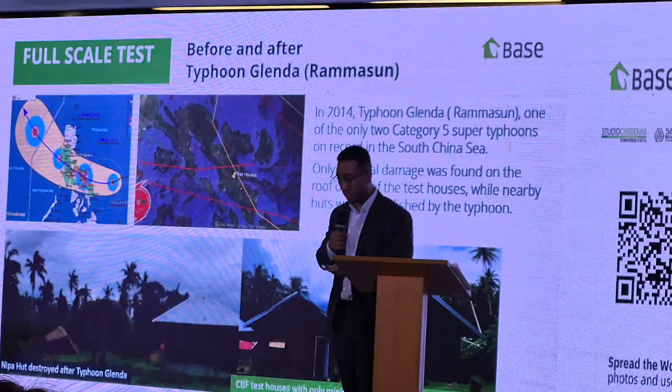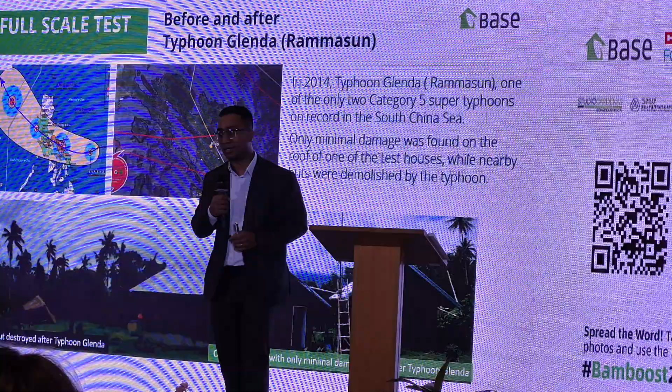As you know, our houses are very good at resisting typhoons. We did a full-scale test back in 2014, when we were still new to the Philippines, and we built 3 pilot houses in the southern area of Luzon. We tried out three different architectural styles, and we had a weather station there that could measure the wind.

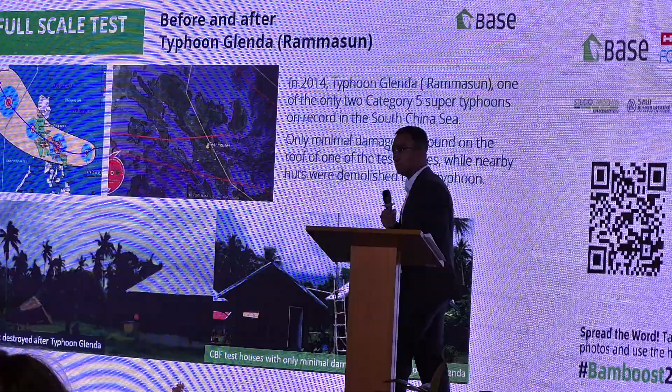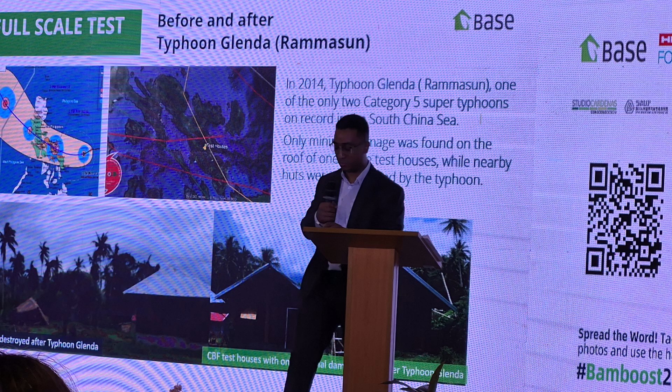Luckily or unluckily, we had a major typhoon pass exactly through the place where we had these houses. We went back after the typhoon, and you can see very minimal damage to the houses. The weather station that was there disappeared forever, we could not find it. But the last reading from the weather station was 220 kilometers per hour. And the good thing here is these houses are still standing.

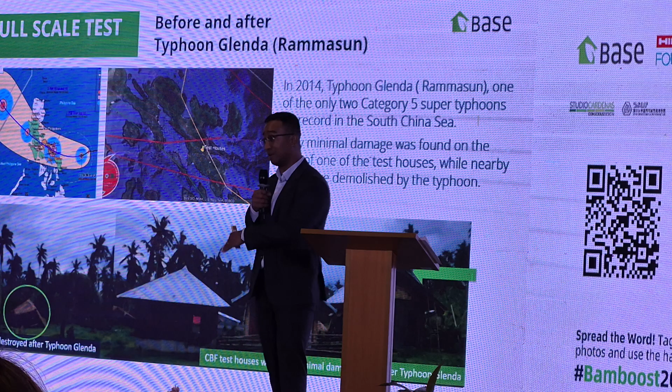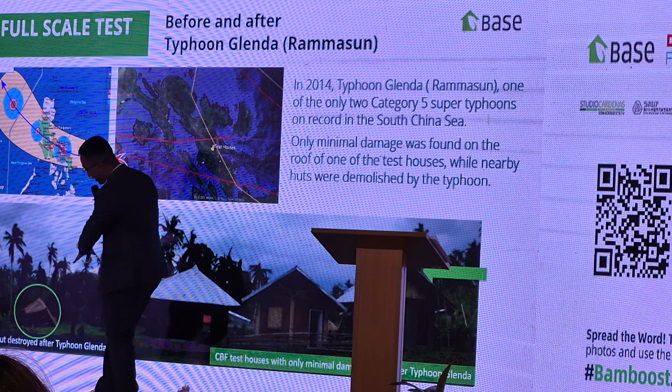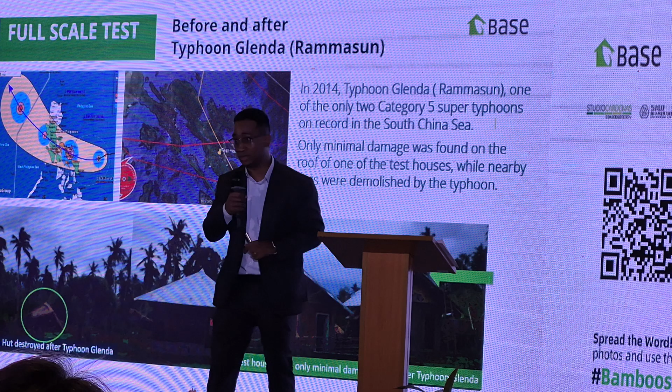People are living there. You can go take a visit and see how the houses have lived through the years. If you look at the farther end at the corner, on the left-hand side, you can see we tried building a house using the traditional approach, and you can see that the house didn't make it through the typhoon. What I'd like to emphasize here is, it's not related to bamboo, whether or not the house is going to stand.

It's actually the technology. With the right technology, you can build long-lasting, permanent bamboo houses anywhere in the world. Taking this as an example, we've tried and experimented and actually built different houses. For example, one-story single detached, one-story duplex. We've also built two-story houses.

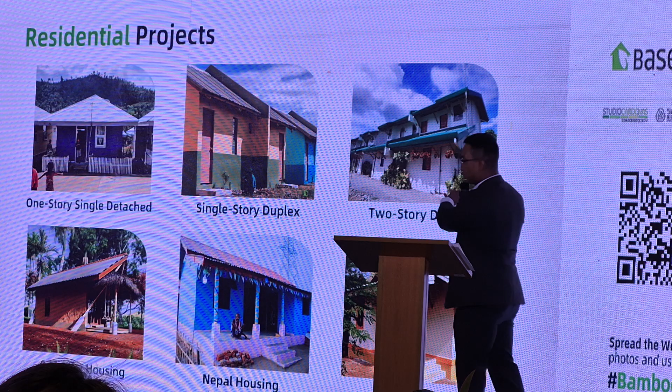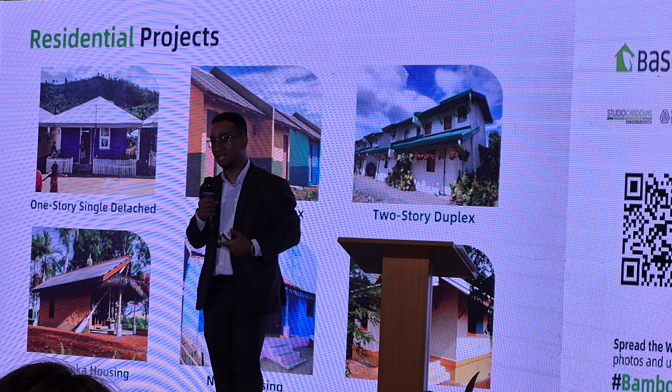I'm really happy to say that our Filipino technology, cement bamboo frame technology, is being well known throughout the world. We've started seeing requests from countries around the Philippines. For example, we've had collaborations with Sri Lanka, Nepal, and India, where we built CBFT houses. What's important here is it's Filipino engineers who go there, transfer the technology, transfer the learnings we had in the Philippines, and help the local nationals over there build these houses. That's something really proud to be in.

Beyond this, we also work on various non-residential projects, for example, school buildings, community centers, weaving centers, offices, orphanages, and also community centers.

To facilitate construction of all these houses and structures around the Philippines, we have a strong network of partners who treat and provide high-quality construction-grade treated poles. In particular, we have 8 treatment facilities, 9 coming, scattered throughout the Philippines: 2 in Luzon, 2 in the Visayas, and 4 in Mindanao. Altogether, they can produce 16,000 poles per month. That's enough to build 150 houses every month.

At the same time, we are partnering with treatment centers in Nepal and Sri Lanka to ensure they can also provide high-quality treated poles in those countries. So up to now, the global impact of our efforts so far is that we built around 2,000 houses. We've saved around 35,000 tons of carbon dioxide. We have sheltered over 10,000 people, and we've trained over 2,000 individuals.

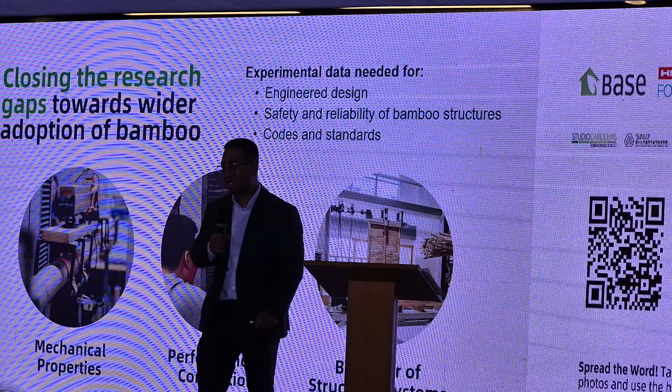Now, one of the most important things about working with bamboo is that there is a strong lack of experimental data. So if you ask any engineer, I want to build with bamboo, they're going to say, no, I cannot do it because I don't know any properties of bamboo.

So right now, we are working really hard to close that gap, provide the necessary data so that you can design and build your own structures.

Primarily, we are working on three different aspects: mechanical properties, which has to do with the behavior of the material itself; the performance of connections, unfortunately one of the least studied topics of bamboo engineering but at the same time the most important thing of the structure; and on the larger scale, the performance of structural systems that make up all of our houses.

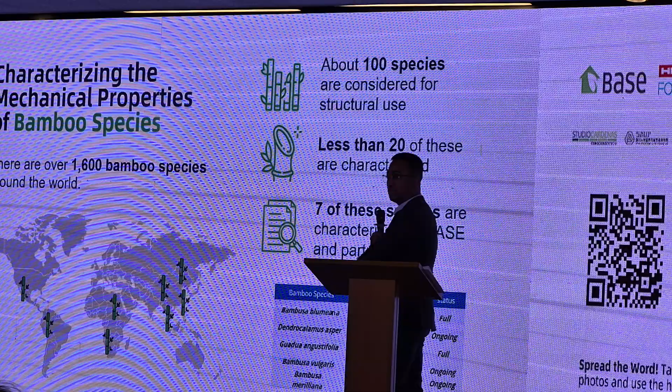Globally, if you look at the species available, there are around 1,600 bamboo species, but only 100 or so are used for construction. And out of the 100, unfortunately less than 20 of them are characterized. Over the last couple of years, BASE and our partners have been working really hard to characterize 7 of them. 5 of those species are available in the Philippines and are already being used for construction through our partners.

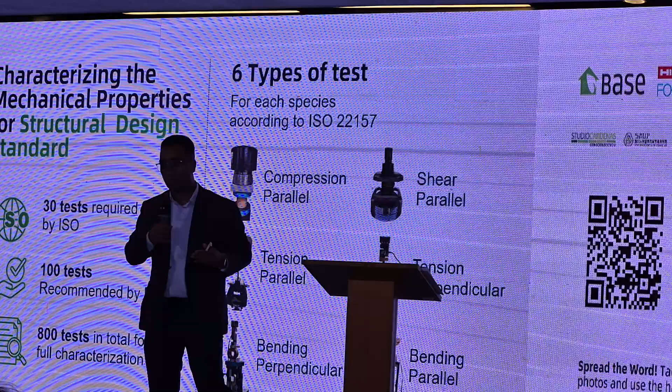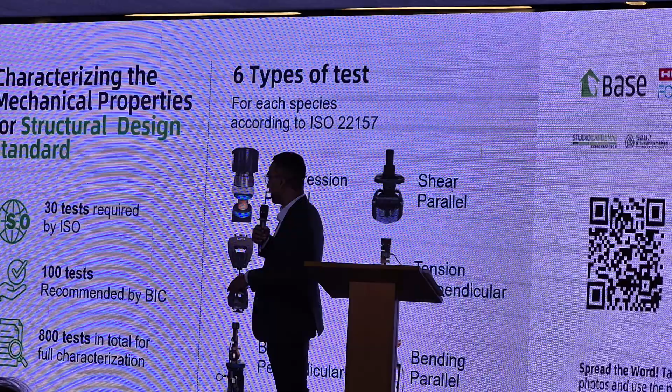A typical characterization process involves testing all of these 6 mechanical properties: compression parallel, shear parallel, tension parallel, perpendicular, and bending. ISO standard tells us we have to test at least 30 different samples. But very early on, we realized that 30 is nowhere enough.

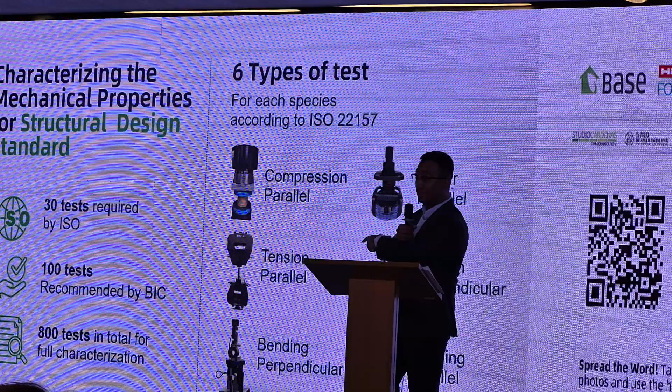The natural variability of bamboo is so high that 30 is not enough. We have to test at least 100 specimens for mechanical properties. So if you want to get a complete characterization of the species, you have to test over 800 specimens. That's a lot of samples to be tested.

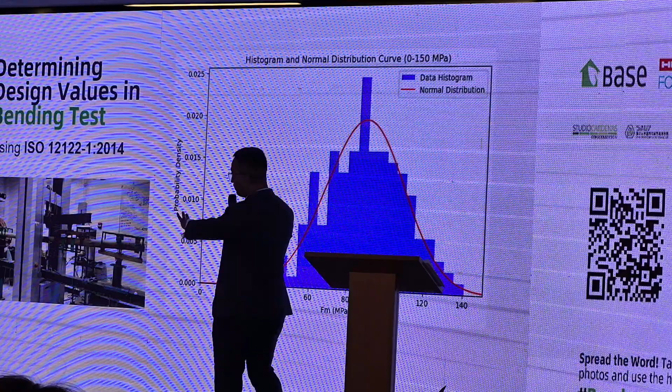And here's an example of how we do our tests. You can see how we do bending in our laboratory, and you can see in the background our R&D engineer and a student from Coventry who's helping us out.

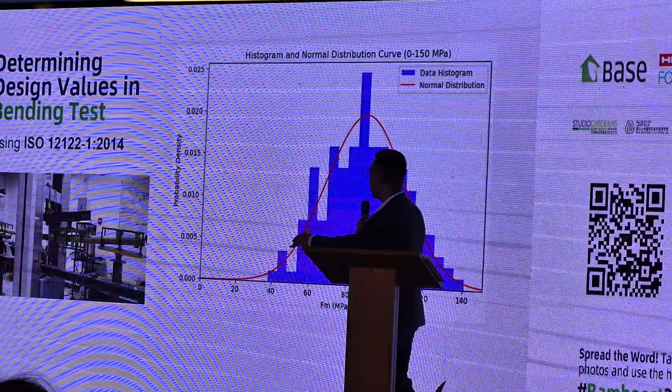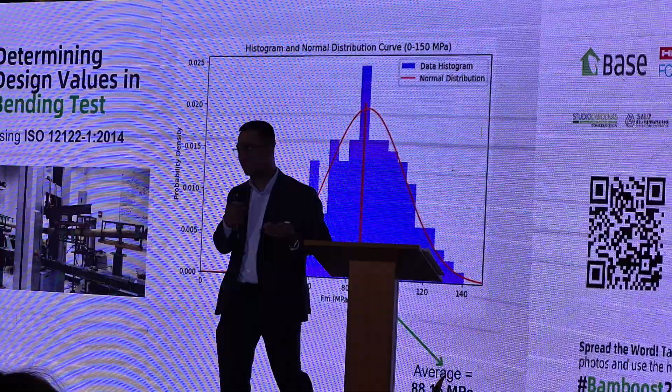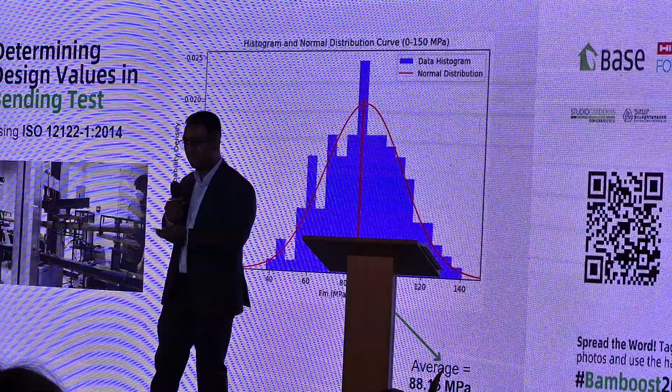But if you think about this, if you design houses using average values, then 50% of the time your members are not going to be strong enough and the house is going to collapse. So we have to choose a smaller value that will ensure that the structure will remain standing.

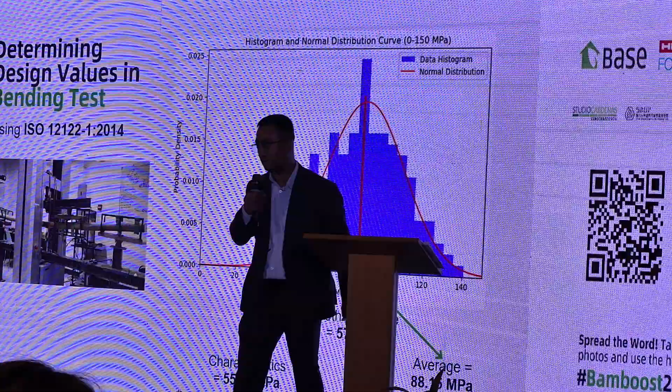So the standard here is to take the 5th percentile of the sample, and we use the 5th percentile of the sample to determine the characteristic of the population. So the value that we're going to use for actual design is 55.18. It's going to be at the lower bound of what the species will have.

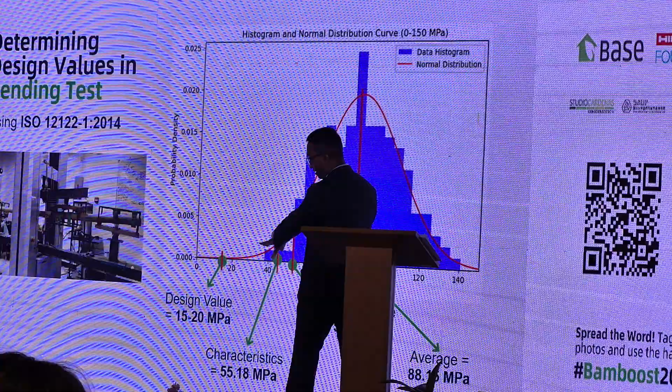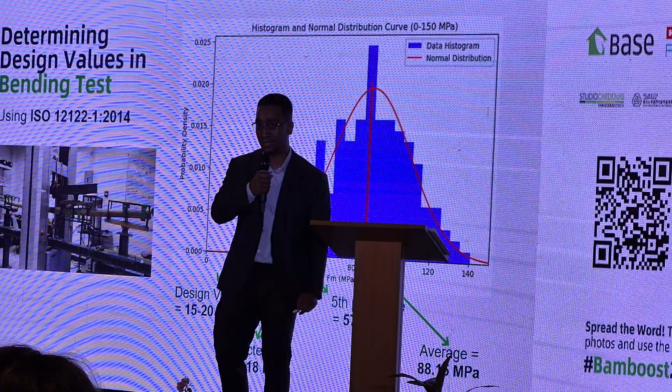Now, when we do the structural design calculations, we have to again adopt safety factors, and the actual value that ends up for the design is around 15 to 20. So if you look at the data, you will not find a single bamboo pole that falls over there. It's really, really safe, with a very high margin of safety, and it's very unlikely to see any damage to the structures.

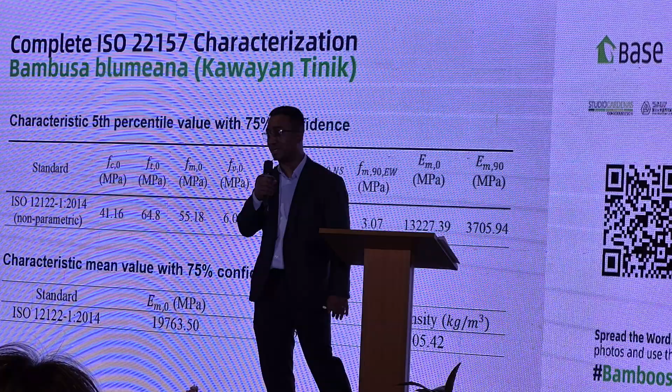So this is the data for Kawayan Tinik, Bambusa blumeana, with complete characterization. You can see all the properties that we need for design, and you can use this to do your structural analysis. It's in the Philippine bamboo guideline.

Now you have to realize that we did around 800 tests, and for this species we did around 1,200 specimens. If you think about it, how many species are there in the world? Over 100 that we can characterize and build houses out of. And if you want to fully characterize all of them, you're going to have to do around 80,000 or over 100,000 tests. That is simply impossible, an insane number.

So we have to look for an alternate way of doing it. Actually, our students from Bamboost University have found a very nice way to get around this. I'm going to show you an example.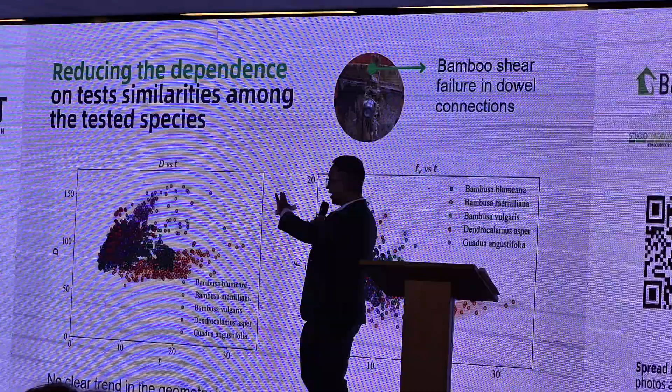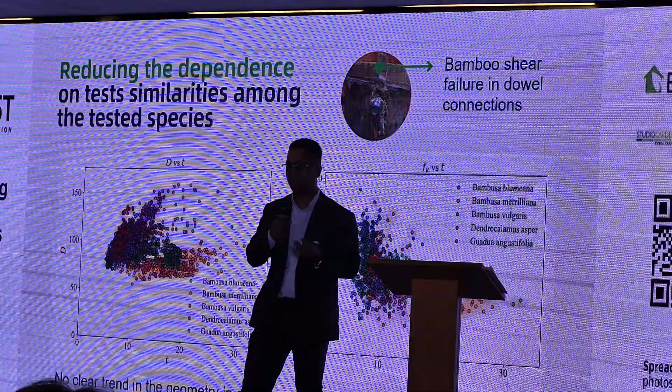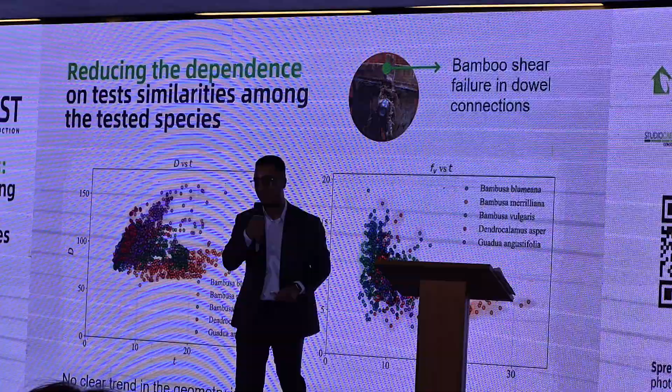So this is a scatter plot of diameter versus thickness of all 5 species we've tested in the Philippines: Bambusa blumeana, Kawayan tinik, Bayog, Bambusa vulgaris, Kauayan kiling, Dendrocalamus asper, which is Botong, and Guadua, iron bamboo. If you look at the properties of diameter versus thickness, which is geometry, you can see there's a lot of scatter in the data. It's a mess, there's no pattern, nothing you can derive out of it.

But if you look at the performance, or the correlation between shear strength and thickness, you can see some pattern here, but in general it is still very diverse.

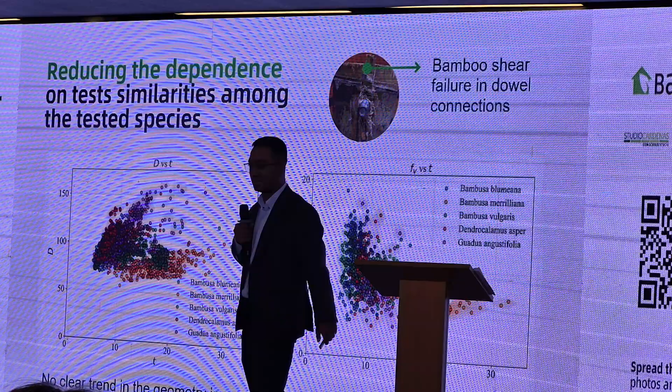It's still very varied, still very hard to see a clear trend, right? So what we found out here is, if you rearrange the geometry a little bit, then a clear pattern emerges among all the species we have tested.

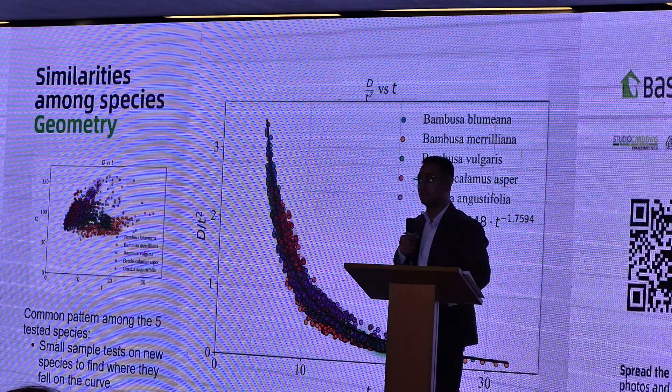And that's very important here. You can see some species fall over here, some fall over here, but what's important is a common trend line can predict the properties of all 5 species we have tested so far.

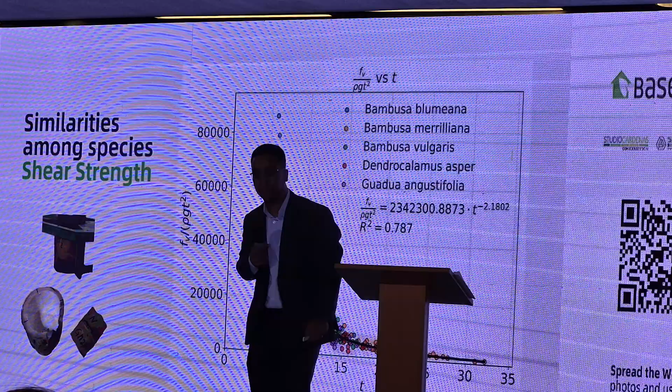And that's not even just for the geometry, you can also do it for the strength. So you can see how a clear pattern emerges.

Now here what you see is the median curve. We're not going to design for the median because 50% of samples will fail. So we go for a lower bound characteristic, and if you look at the design curve, there will be no specimen that will ever fail if you use the design curve.

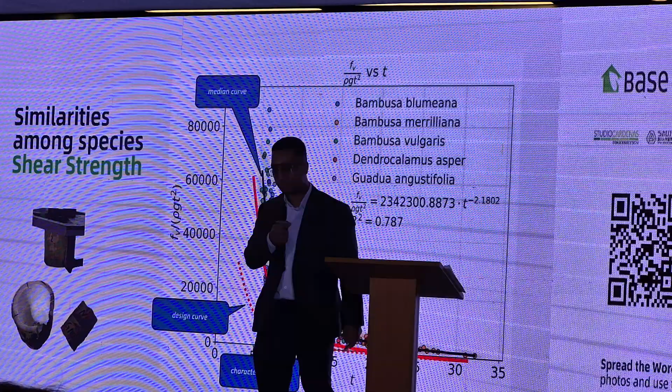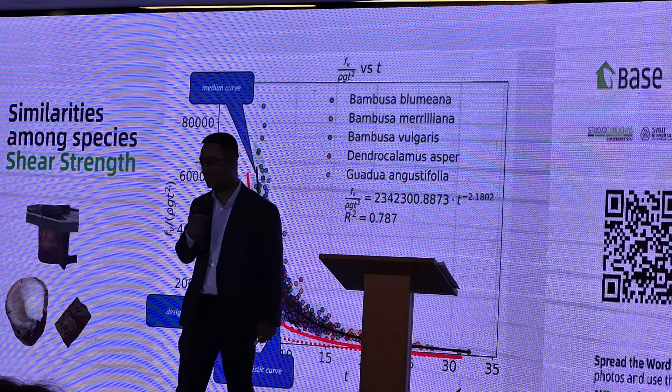So you can see a clear trend and pattern. Now what's important here is we tried something more. We tried fitting into this curve a new species that you cannot find in the Philippines.

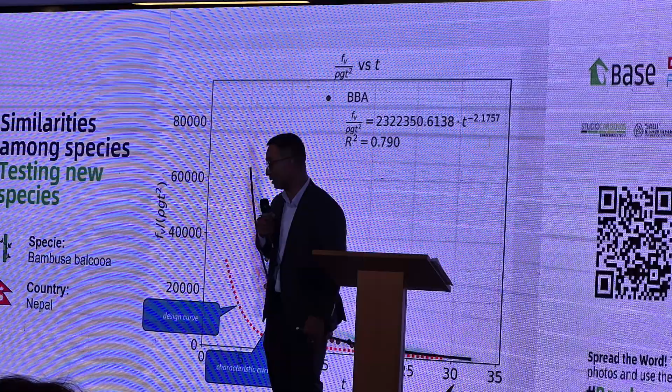So this is from my data from Nepal, and you can see the species Bambusa balcooa falls exactly on the median line. So you're looking at a species that has never been calibrated to this curve, and yet this curve can predict the strength parameters of a new unknown species from an entirely different geography.

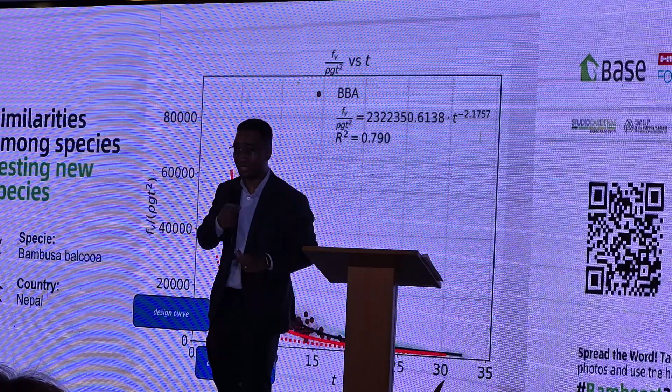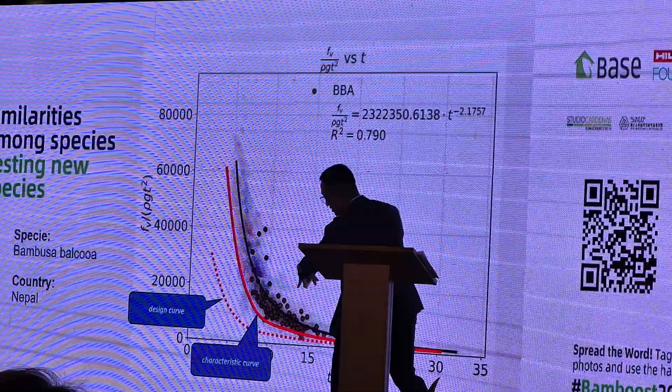That's very powerful. What it means is, instead of testing 800 specimens for a species, you can maybe test 10 specimens, see where it falls in this line, and still use this derived curve to get the design values. So it's going to make things really easy for you guys.

Beyond this, I'm going to talk a little bit about the connections. So in connections also, let's talk about our cement bamboo frame technology. Even a single story house like this will have maybe 20 different connections.

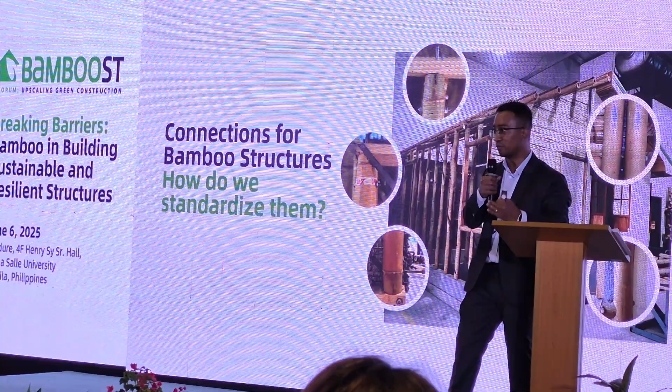Similarly to mechanical properties, the current state of the art for bamboo design is testing. All the 5 connections you see here have to be tested in a lab to find these design values. And simply thinking about this, if you move on to a large-scale structural system for high construction, you will have a lot of connections that you don't know how to design.

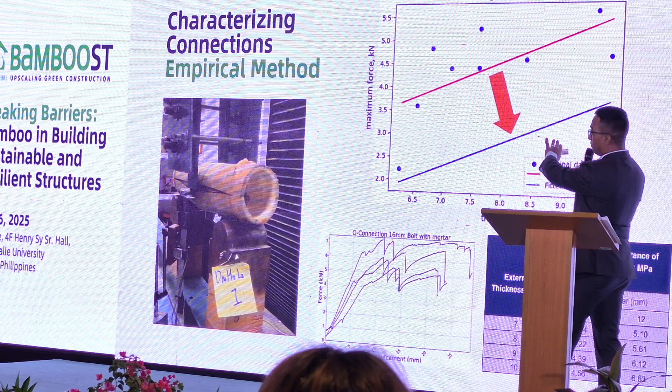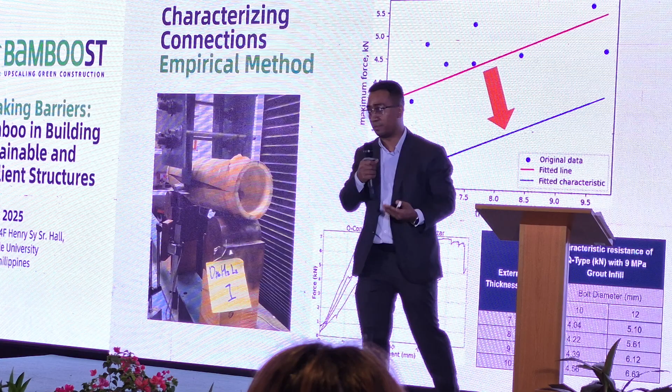And if you follow this state-of-the-art method where you do a test, find the correlation between maximum force and thickness, get the median value, get the characteristic value, and then convert that to a table and design with this table, it's simply impossible to keep up with the design. Even a house like the one I showed you will have 20 different connections, and you simply cannot do it. So we have to find a different way to design connections for bamboo.

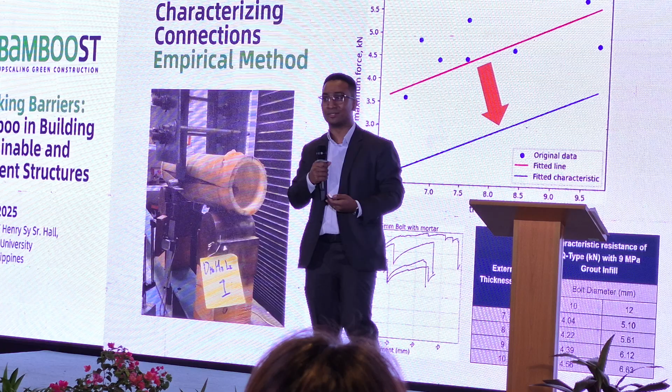And I have something very interesting for you guys. I'm going to take an example of an O-connection that we tested in our lab, and this is how a typical response looks like. About this point of time, you can see the curve tapers off, and in structural engineering we'd like to call it yielding.

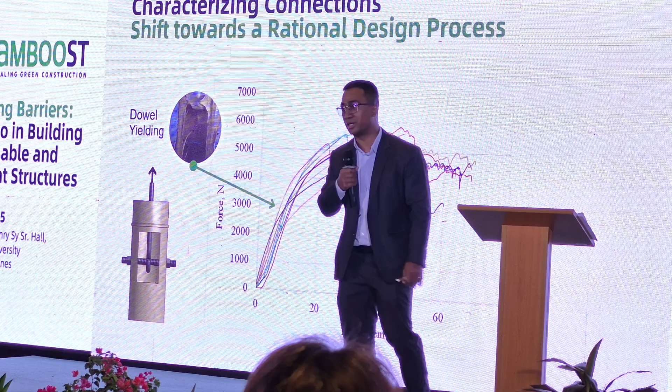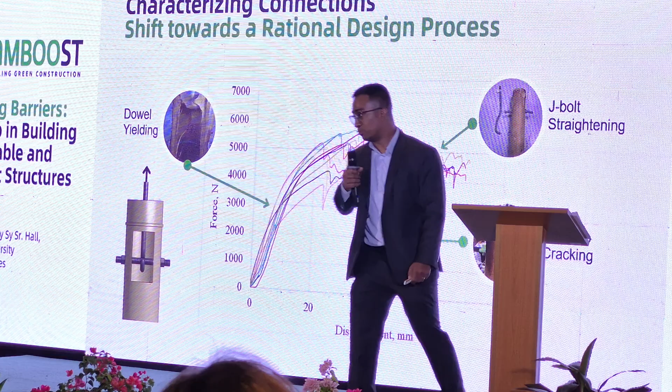It's actually a very important parameter that serves as a basis of structural design. If you go further, you can also see other damage modifiers such as J-bolt straightening and damage to bamboo. But what's important here is we focus on dowel yielding first, and it turns out we can predict it—which means you don't need to do testing, you don't need to do any further analysis.

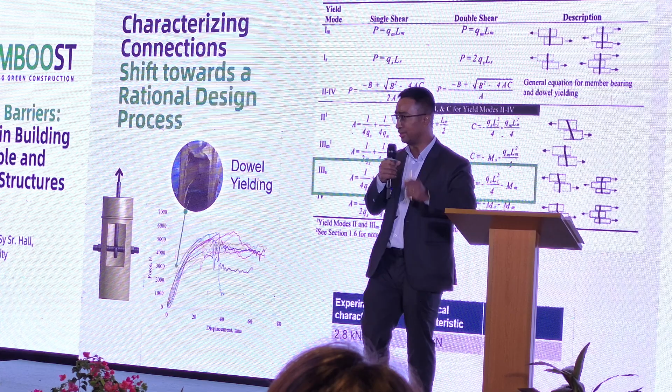If you look at these equations, which as a structural engineer we'd like to show everybody because it kind of shows how smart we are, but not really—you can see that if you use this equation to try to predict the dowel yield, there's only less than 5% difference.

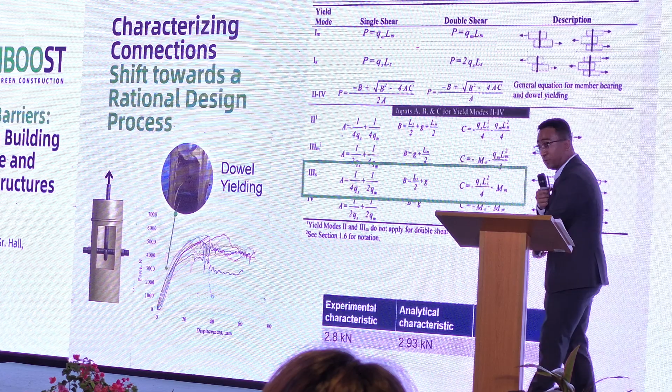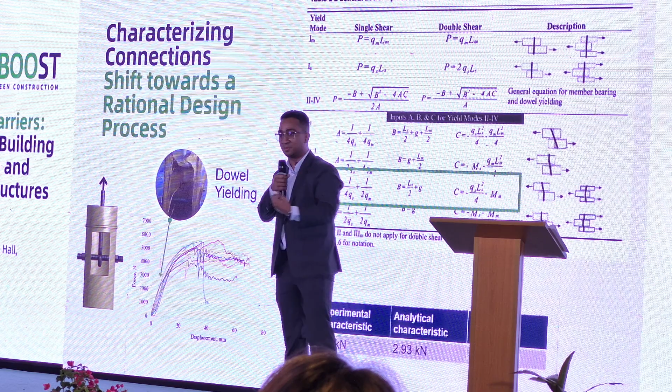That's really important. This equation can help you predict the capacity of an O-connection like this, and you can alter the dimension, alter the species, alter the specification of the steel. You can do a lot of these changes and still arrive at a value you can use to predict. So no over-testing for you guys—we can close our BIC from tomorrow.

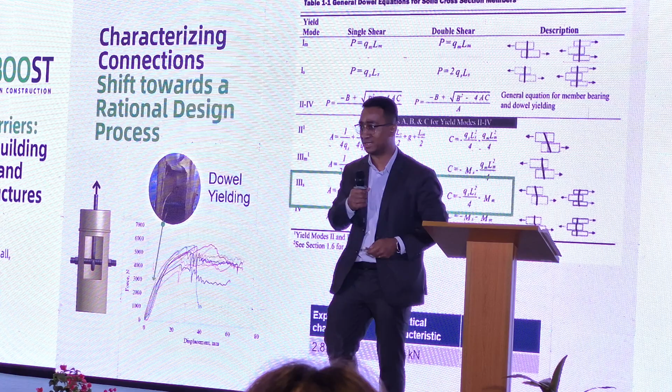So we tried this out with a different species, with a different connection, and it turns out we can still predict it, about 6% difference. These equations are not new, they're actually already existing for timber. We just tried them out for bamboo to see how it goes, and it turns out it works very well.

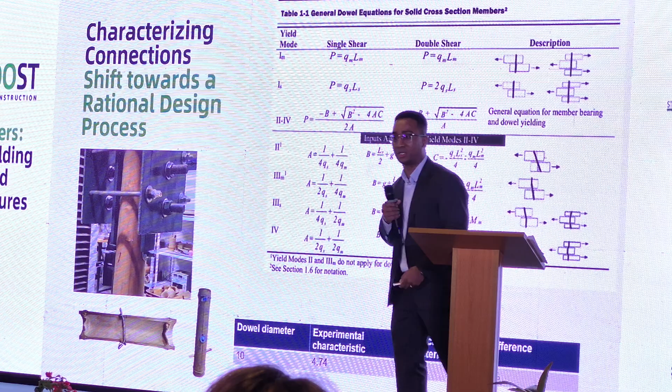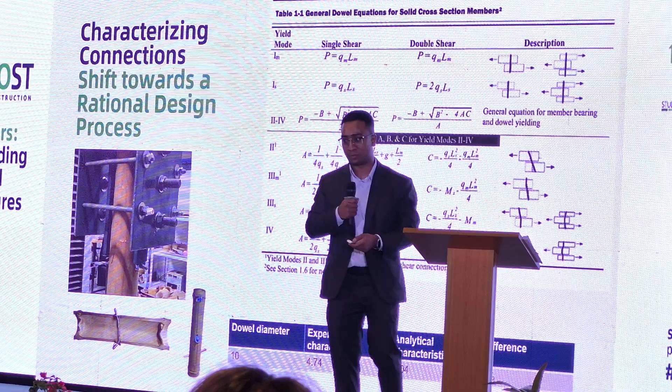So I realized there's a video over there. You can see how the wood is deforming, and these equations can help you predict how much the wood will deform. Now let's go back to the meat of my presentation.

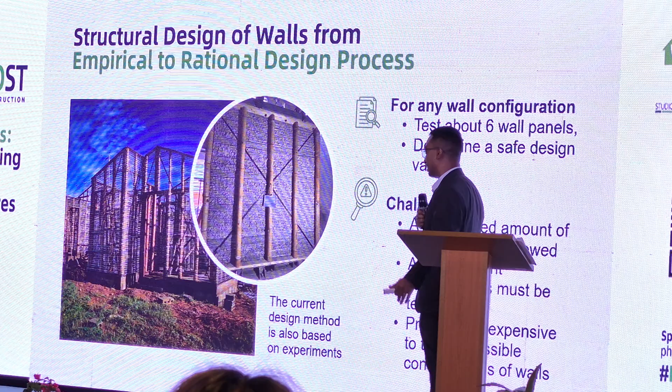That's the cement bamboo shear walls. All of our houses are built using this technology, and unfortunately, the design of these systems is also experimental.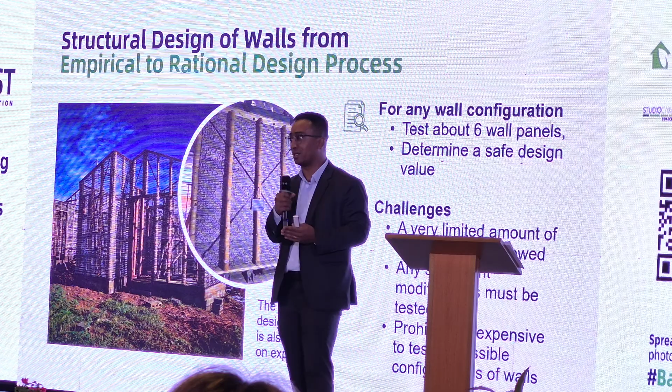To design this house, I first had to go to a lab, do this test, and figure out the performance. It has a benefit in that you have a straightforward way of designing things, but the drawback is it allows a very limited amount of change. And I know from our partners that it's really frustrating.

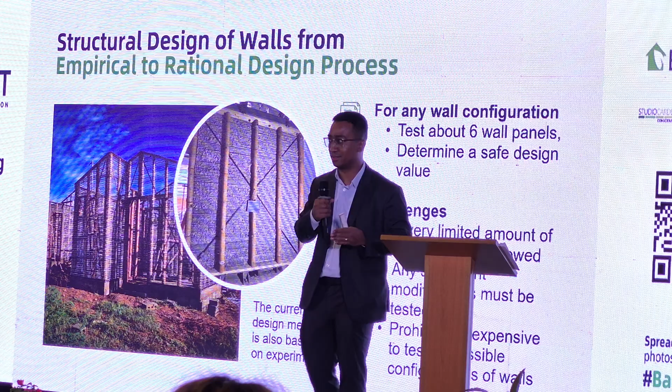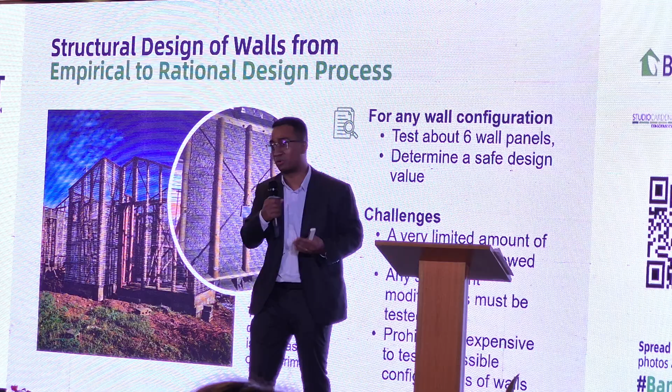You want to change a little bit of the walls, make a wall a little bit longer or larger, use a different species, and it's quite frustrating to hear that it's not possible. The reason is this: we have to base our design on experiments.

If you start making a lot of changes to the system, you will end up with a wall that's completely different from what we tested. Then we have to start over again and start testing. This is going to be really expensive and hard.

So we've been working really hard to figure out how to get over this. We want to help you design bamboo houses to fit your unique needs, to fit your projects. So we found a way to do this, and I'll show you.

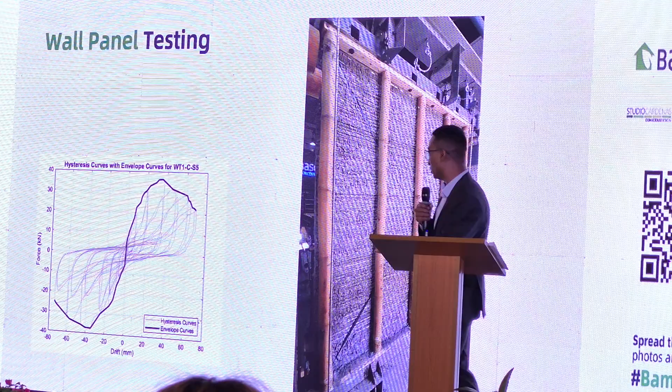Before I show you how we did it, I'll show you how we do a typical test. For example, we have a system in our laboratory that applies wind and seismic loads, simulating them onto the walls. This is a typical response under wind and seismic.

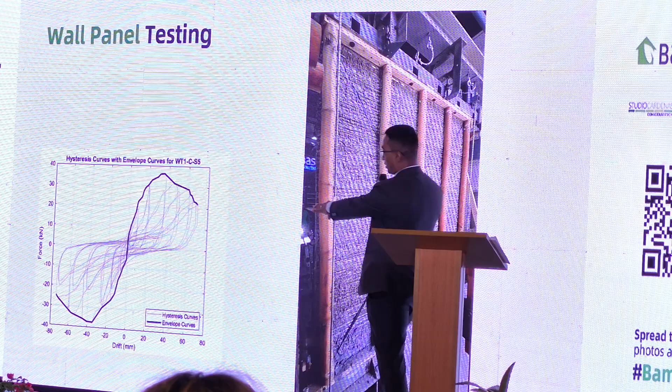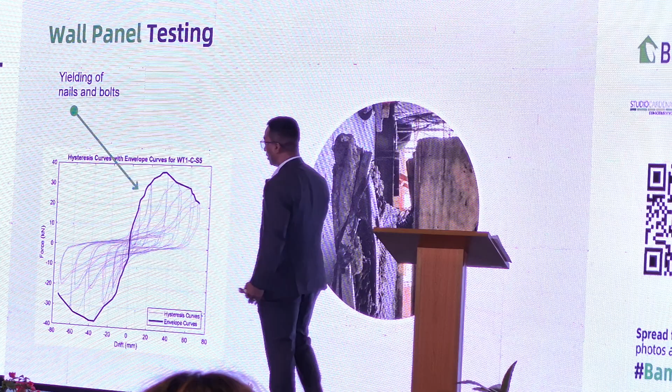What's important here is the black line, which we call the backbone curve. Similarly to what we saw in connections, the part of the curve where it starts tapering off we call yielding. It turns out the yielding happens from nails and bolts.

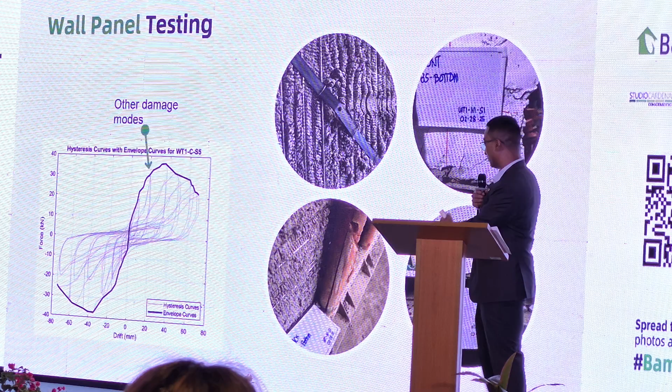The nails connect the frame elements, that is bamboo and timber, to the cladding, that is mortar. If you load it further, you will see other damage modes: flat bars, damage to bamboo, cracking in mortar, but these are not so important.

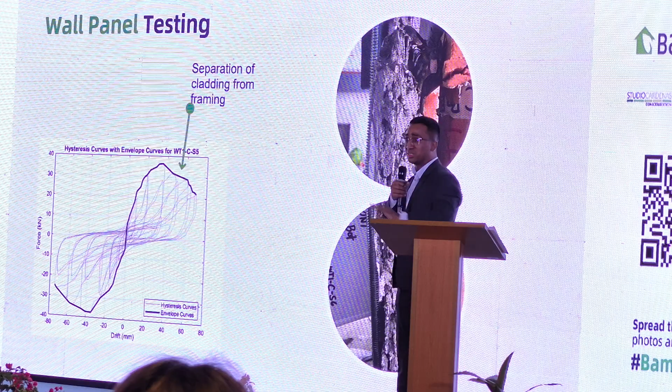If you load it even further, the wall starts disintegrating. You see separation of cladding from framing, but what's important here is you are not going to see collapse of the wall. We tested over 50 walls so far over the last 5 years, and not a single time has any wall collapsed on us in the lab.

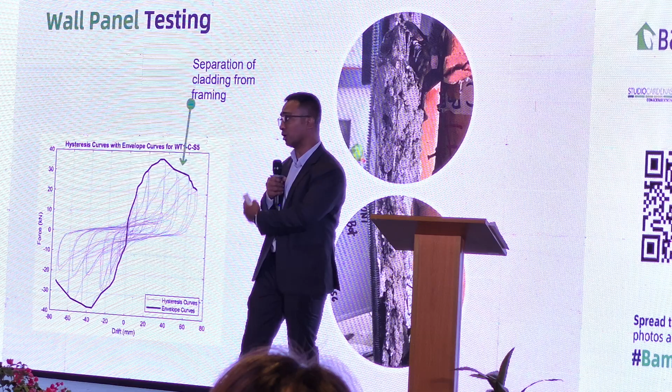So it's actually quite boring. You go to a lab expecting walls to completely disintegrate, but it just stands there and the test is already over. So I go back to the yield point here.

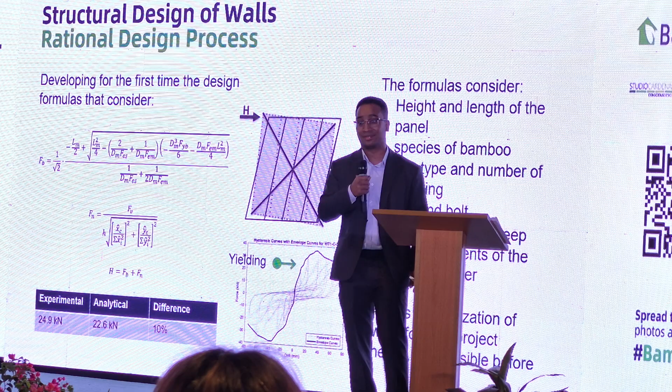I go back to the yielding point, and it turns out we can estimate it—we can predict the yielding of the walls. I'm happy to say this is the first time anybody in the world has ever done it, and I'm really happy to share that it happened in the Philippines.

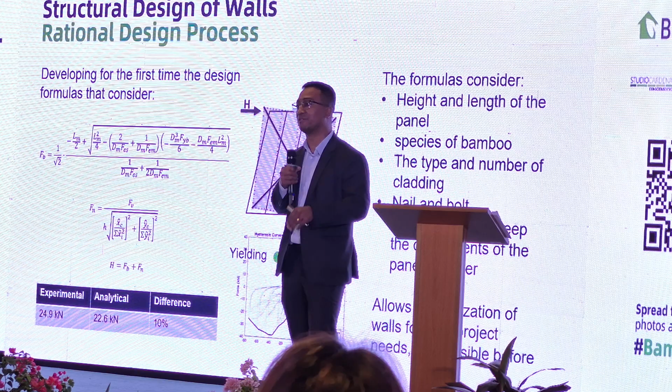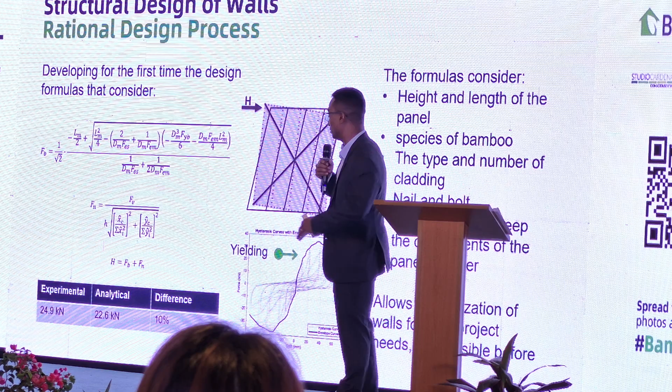This is really good because now you can use it to really improve the structure. This equation is very complicated—I know, even I don't fully understand it, it was realized by my students. But what's important is these equations allow you to modify the panels.

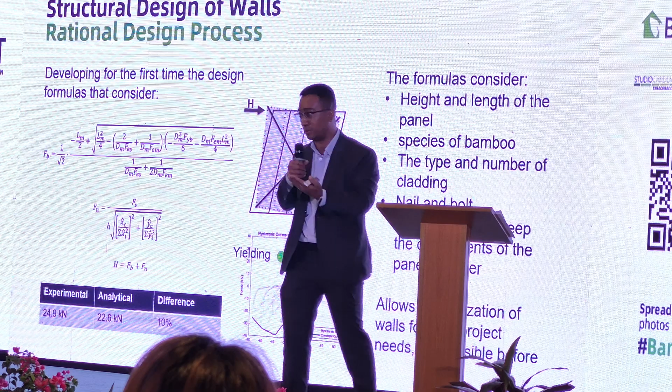You want to have a panel that's slightly longer, wider, or higher. You want to use a different species. You cannot find the specific material in your area and want to replace it with something else. These equations will allow you to do that.

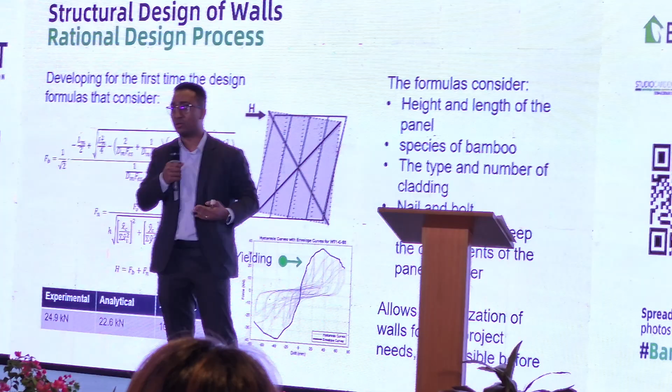What's important here is we are going to roll this out into our design process, so you are going to start seeing the benefits of this innovation as early as next year. So please stay tuned.

Keep your interest. I'd like to close this session by saying that what we are doing here is not enough. I really need your help, I really need you to be with us. Please come and join and work with us and close the research gaps together. So this is my presentation. Thank you all.